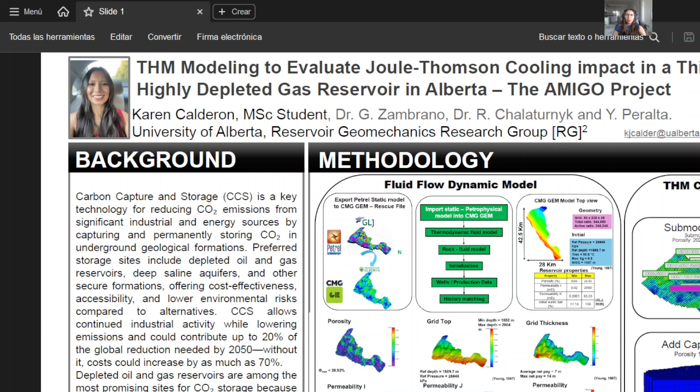Today, I'm going to present my research, titled Thermohydromechanical Modeling to Evaluate Joule-Thomson Cooling Impact in a Thin, Highly Depleted Gas Reservoir in Alberta, also called the AMIGO project.

As background, carbon capture and storage is a key technology for reducing CO2 emissions from significant industrial and energy sources by capturing and permanently storing CO2 in underground geological formations. Preferred storage sites include depleted oil and gas reservoirs, deep saline aquifers, and other secure formations, offering cost effectiveness, accessibility, and lower environmental risk compared with other alternatives.

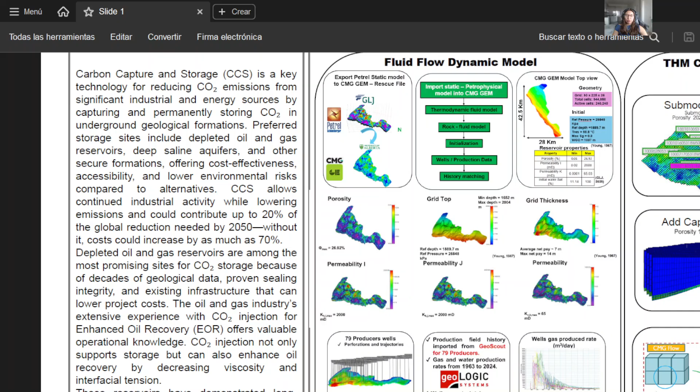CCS allows continual industrial activity while lowering emissions and could contribute up to 20% of the global reduction needed by 2050. Without doing this, costs could increase by as much as 70%.

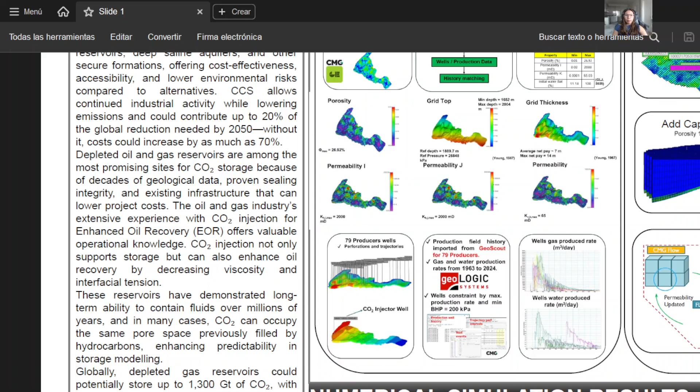Depleted oil and gas reservoirs are among the most promising sites for CO2 storage because of decades of geological data proving sealing integrity and existing infrastructure that can lower the capex of the projects. The oil and gas industry's extensive experience with CO2 injection during enhanced oil recovery offers valuable operational knowledge. CO2 injection not only supports storage but can also enhance oil recovery by decreasing viscosity and interfacial tension.

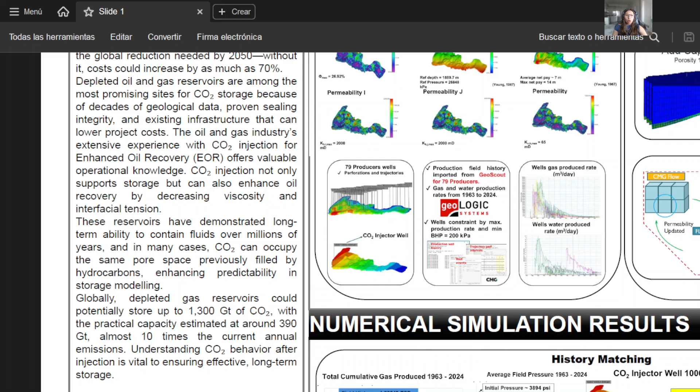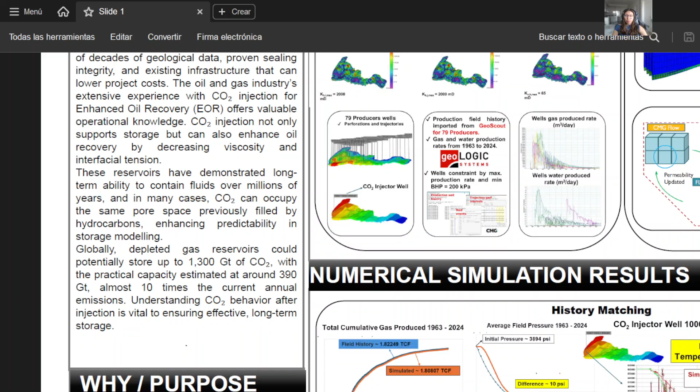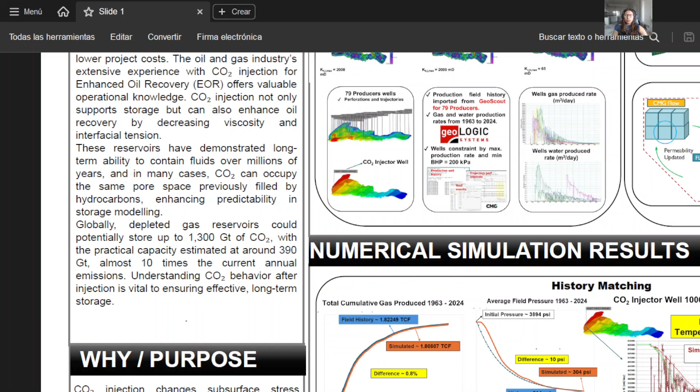These reservoirs have demonstrated long-term ability to contain fluids over millions of years, and in many cases, CO2 can occupy the pore space that was occupied by hydrocarbons, which could enhance predictability in storage modeling. Globally, depleted gas reservoirs could potentially store up to 1,300 gigatons of CO2, with a practical capacity estimated at around 390 gigatons. However, understanding CO2 behavior after injection is vital to ensuring effective long-term storage.

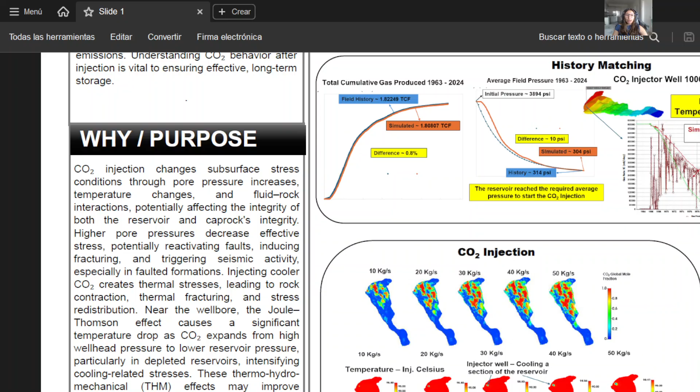So, the purpose of my project: CO2 injection changes subsurface stress conditions through pore pressure increases, temperature changes, and fluid-rock interactions, potentially affecting the integrity of both the reservoir and the caprock. Higher pore pressures decrease effective stresses, potentially reactivating faults, inducing new fractures, and triggering seismic activity, especially in faulted formations.

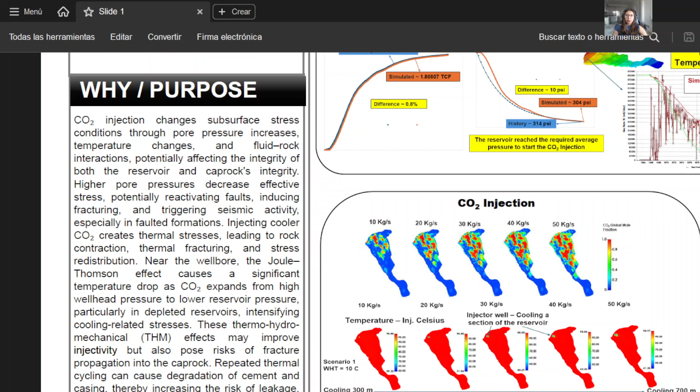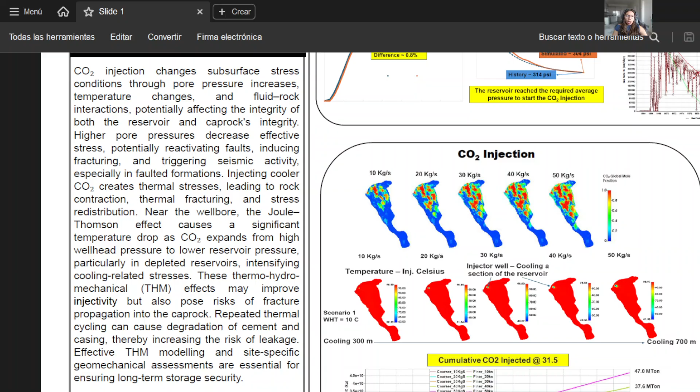Injecting cooler CO2 creates thermal stresses, leading to rock contraction, thermal fracturing, and stress redistribution. Near the wellbore, the Joule-Thomson cooling effect causes a significant temperature drop as CO2 expands from high pressure at the wellhead to lower pressure inside the reservoir, particularly in depleted reservoirs, intensifying the cooling-related stresses. These thermohydromechanical effects may improve injectivity, but could also cause risk of fracture propagation in the caprock.

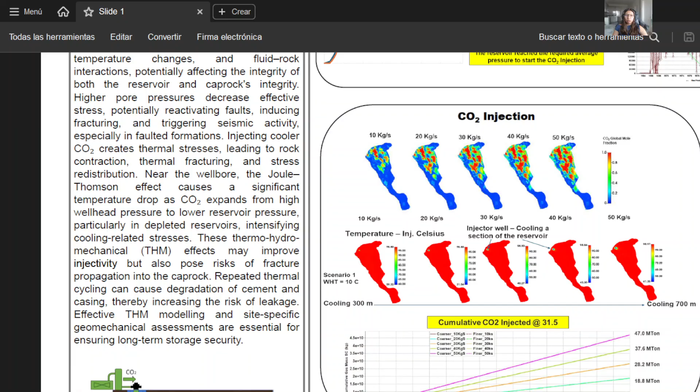Repeated thermal cycling can cause degradation of the cement and casing, thereby increasing the risk of CO2 leakage to the surface. So, an effective thermohydromechanical model and site-specific geomechanical assessments are essential for ensuring long-term storage security.

Now I'm going to present the methodology that we followed for my research. This methodology is divided into two sections: one for the flow dynamic model, and the other for the thermohydromechanical model.

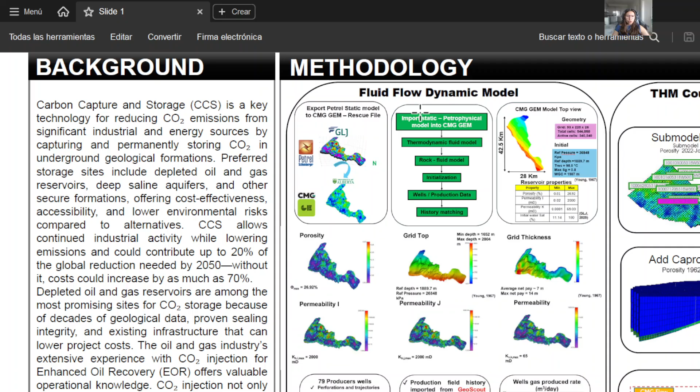For the fluid flow model, we start by getting the static model created by GLJ, who provided us a coarse model and a refined model. We decided to stay with the coarse model in order to speed up runtime simulation.

We import this static model into CMG, then we start importing the static petrophysical parameters, including the thermodynamic fluid model, rock fluid model, initialization parameters, and wells production data, which allows us to get the history matching production rate and depleted pressure.

For this model, we had a geometry of a total of 544,000 cells, with active cells of around 240,000.

As initial parameters or initial values, we know the initial pressure is around 27,000 kPa. The reference depth is around 2,000 meters. The reservoir temperature is around 98 Celsius, with a maximum gas saturation of 0.8, and a water-gas contact at around 2,000 meters.

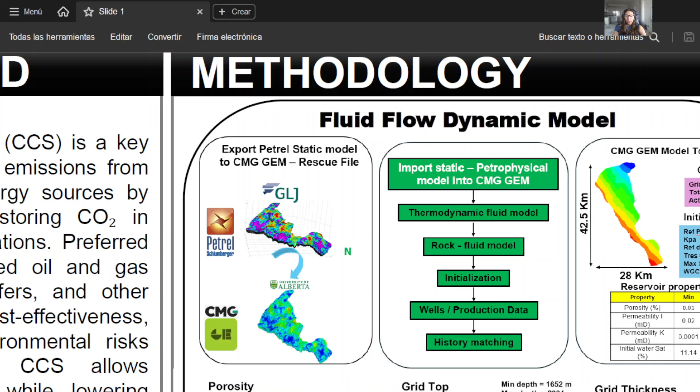We also use the reservoir properties: porosity goes from 0.01% to around 27%. Permeability in I goes from 0.02 millidarcy to 2000 millidarcy. Permeability in K goes from 0.0001 millidarcy to around 65 millidarcy. And the initial water saturation goes from 11% to 100%.

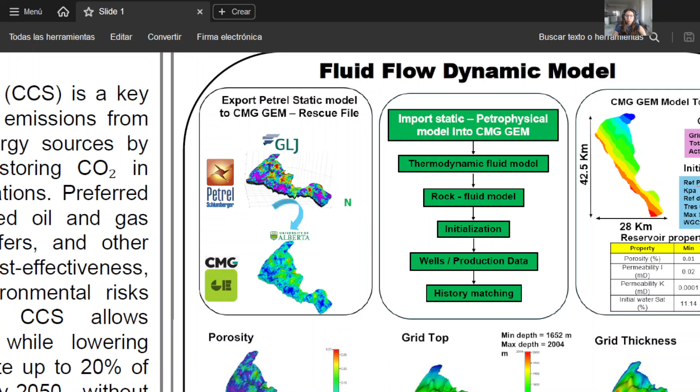Having all these parameters and reservoir properties, we imported them into our reservoir model in GEM, and here you can see how our model looks at the end.

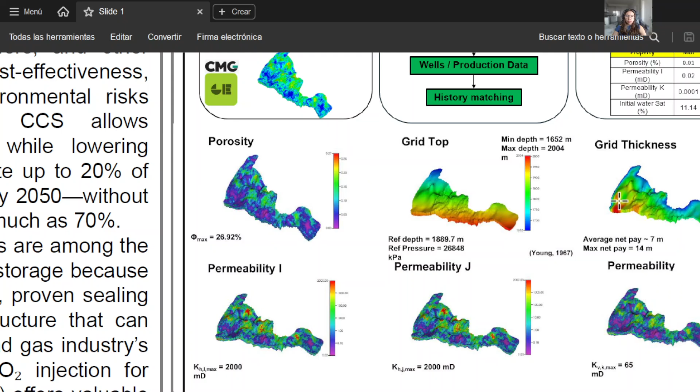Having our petrophysical model ready, we create and import the 79 producer wells. When we add the perforations and trajectories for these wells, we locate our injector well, and using the data available in GeoScout, we were able to get from these 79 wells the gas and water production rate from 1963 to 2024.

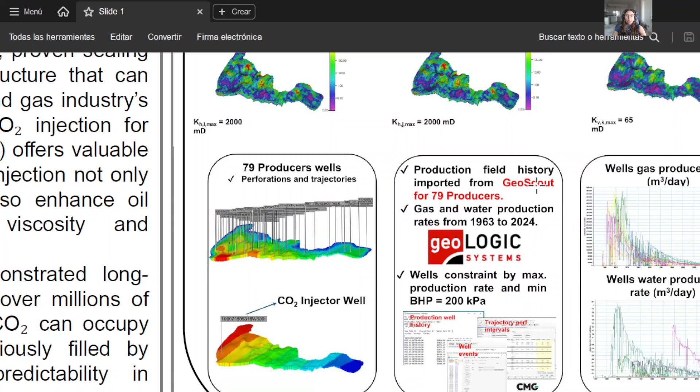Having this data, we imported it into GEM and created the constraints of maximum production rate and a minimum bottom-hole pressure of 200 kPa. This is our model. At this point, our model was ready, and then we can start doing the history matching.

Also, once our model was ready, we did an isothermal model in order to find the maximum CO2 storage capacity of our field, and a non-isothermal model in order to evaluate the cooling impact of the CO2 in the reservoir.

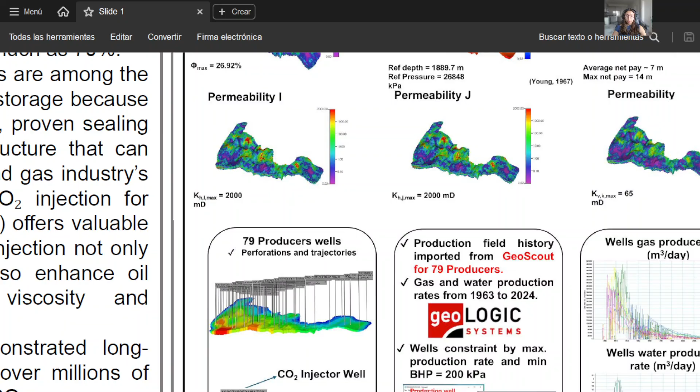Then, once our model was ready and the history matching was done, we can move to the second part of the methodology, the thermohydromechanical submodel methodology, in order to evaluate the Joule-Thomson cooling effect.

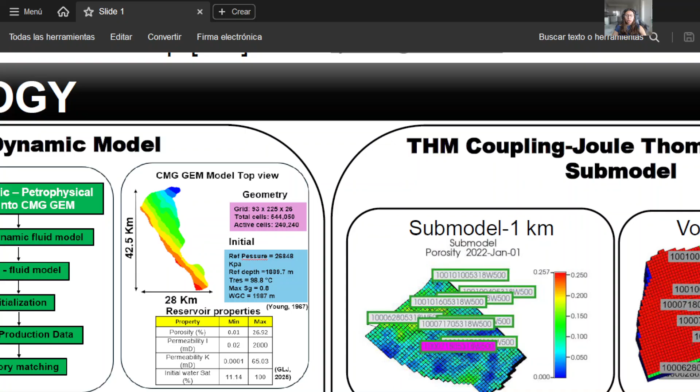For this, we decided to stay with a submodel of 1 kilometer around the target well. Having the submodel, we needed to account for the removed volume that we didn't take into our submodel. So we add volume multipliers in our submodel in order to account for the removed volume from the field.

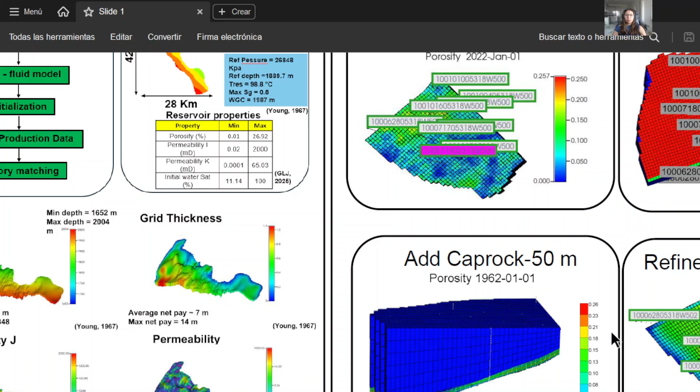With that, we added our cap-rock, and for this one we added 50 meters of cap-rock, and we used a porosity of 0.001 for our cap-rock. With the cap-rock ready, we refine around the wellbore in order to have a more precise plume and be able to analyze and interpret the plume behavior of the CO2 around the wellbore.

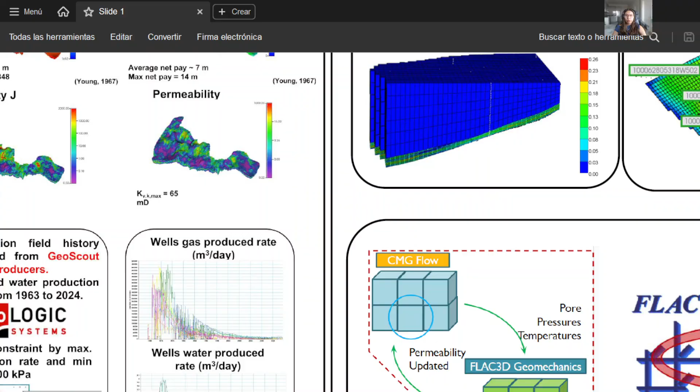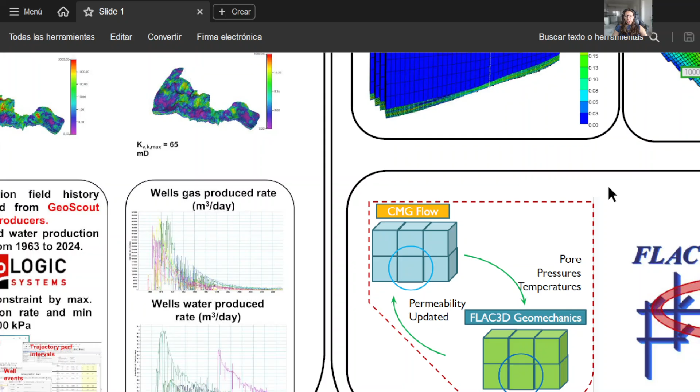Having our submodel ready, then we can create the flow files and the mechanical files in order to do our coupling model, where we are going to use FLAC 3D and GEM CMG, and we are going to couple this software together in order to run simultaneously, feeding back and forth pore pressures, temperatures, and updated permeability for the different injection scenarios. At this point, we will be able to evaluate the impact of the cooling effect in the reservoir, especially in the cap-rock.

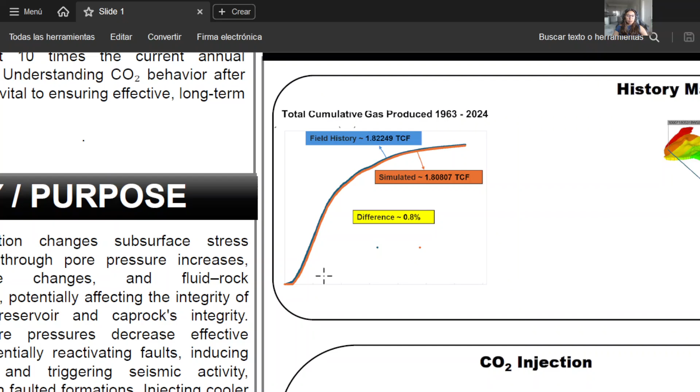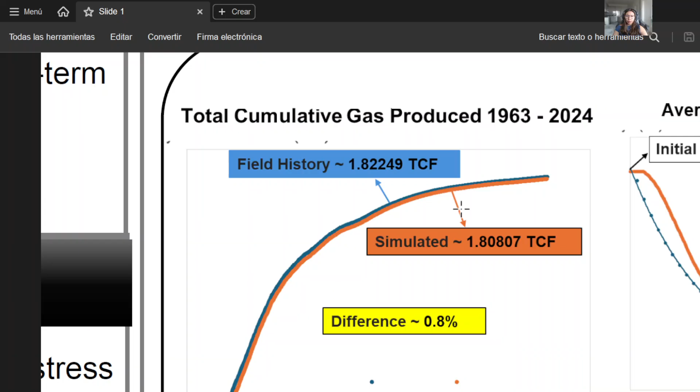Now I'm going to present the numerical simulation results we have so far. First, I'm going to start talking about the history match, that is the history match for our entire field. Here in this plot, you can see the total cumulative gas produced from 1963 to 2024. The blue trend is the field history, and the orange trend is the simulated one, where we can see a difference of 0.8% between these two values, which shows that our simulated model is pretty accurate and really close to the real history of the field.

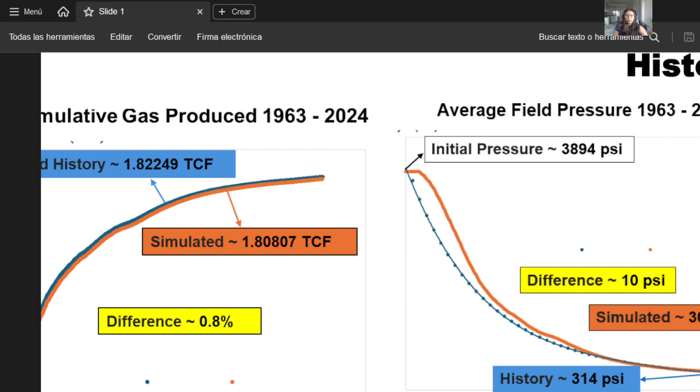Then we move to one of the most important parameters in order to do CO2 storage in a depleted gas reservoir, that is our average field pressure. Again, the blue trend is the field history and the orange trend is the simulated one, which at the end matches the history. We knew that the actual depleted pressure of our field is 314 psi, and from the simulated one we got 304 psi, which gives us a difference of 10 psi. This is pretty okay, a really low error, which gives us a really good accurate simulated field.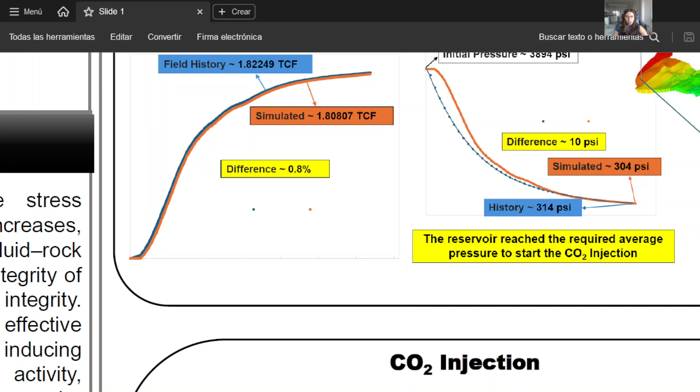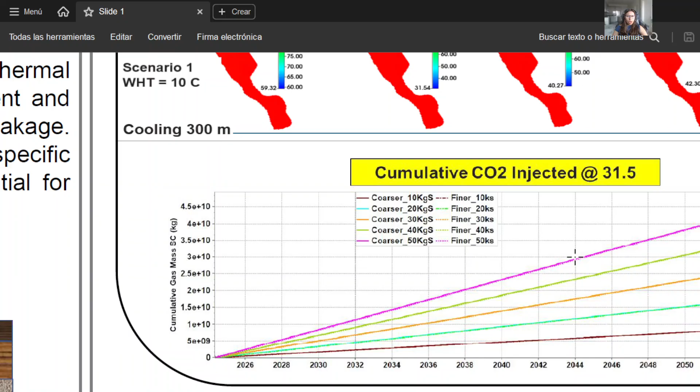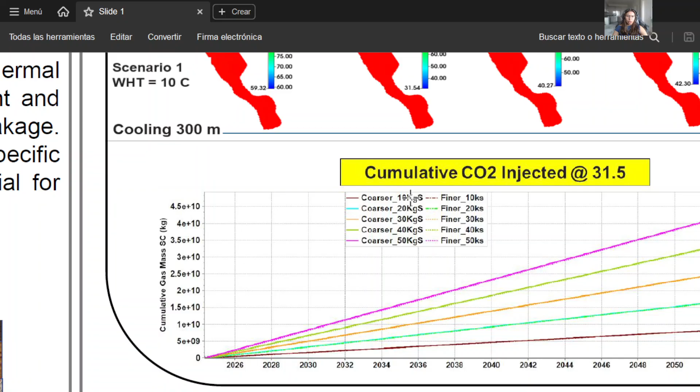Now, from the isothermal and non-isothermal models, we got the following results for CO2 injection in the entire field. I'm going to start first with the isothermal results. The goal with the isothermal results is to get a general overview of how much storage capacity our well and our field are going to have. For this one, we ran different injection rates, and we did it in the coarser model and in the finer model to see if we get any discrepancies between these two, but we got the same values, and we got different storage capacities depending on the CO2 rate injected in that model.

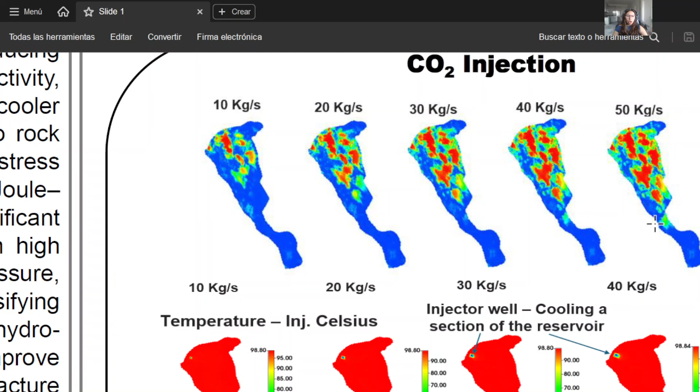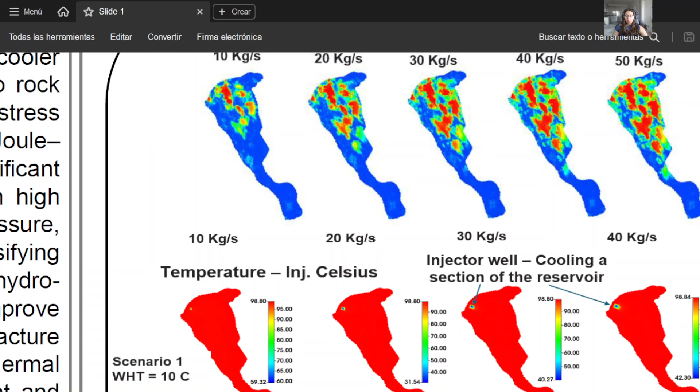For the non-isothermal model, we did two scenarios: one where our wellhead temperature was 10 Celsius and the other 40 Celsius. Here I'm presenting the results for scenario number one, where the temperature of the CO2 at the wellhead is 10 Celsius, and we can see different injection rates. We can appreciate that the cooling effect for the rate of 10 kilograms of CO2 per second is just 300 meters around the wellbore. But when we increase the rate up to 50 kilograms per second, we get a cooling effect of 700 meters around the wellbore.

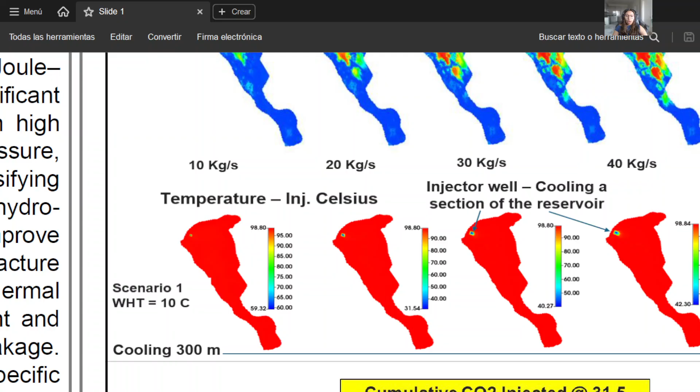So this gives us an overview of how the cooling effect is going to be impacting the entire field. But if we need to really focus and get more detail on how this is really impacting, we need to do the thermo-hydro-mechanical model. For that model, so far we have the following results.

We already got the submodel with the volume modifiers that account for 0.4 of the volume that was removed. We added the cap-rock, refined it, and in this plot, where we had average pressure and years, we can see that the models really overlap with each other, meaning that our submodel is really reflecting the same behavior that the entire field submodel was reflecting, and we are ready to couple it and run the different injection scenarios to account for the cooling effect.

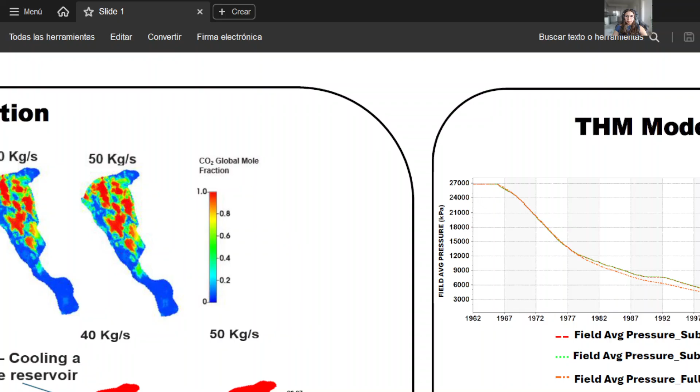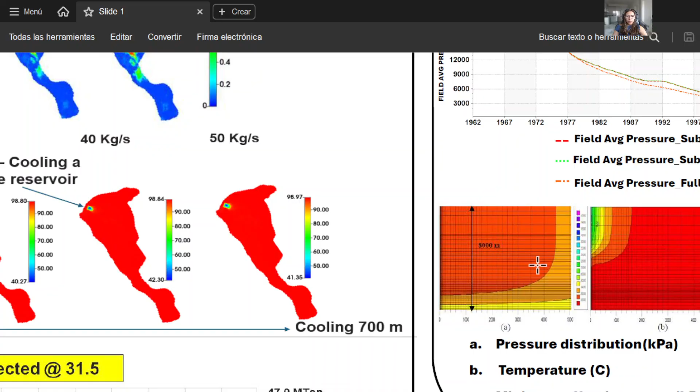As for the results we expect to get, we also want to get pressure distribution, temperature distribution, and minimum effective stress distribution around the wellbore under different injection scenarios, as we did for the entire field. This is a work in progress, so maybe next year I'm going to be able to present to you the final results. That's everything for now. Thank you so much for your time, and I hope that you like it.